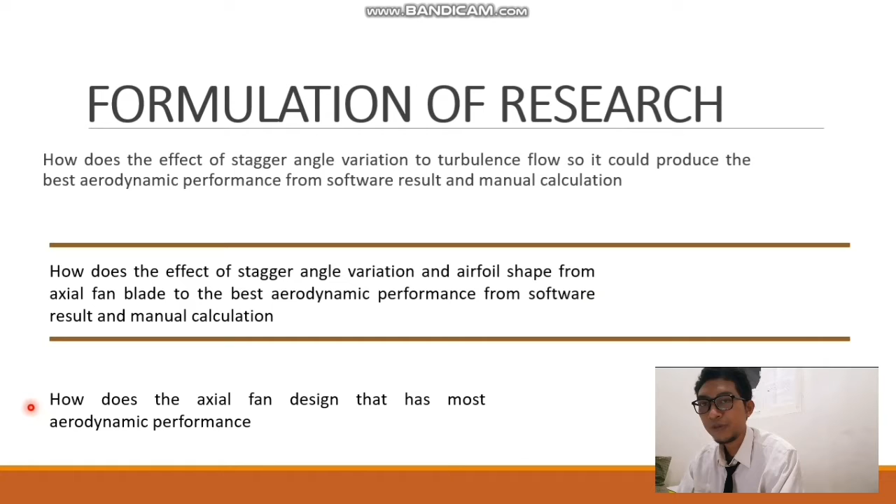Next, my limitation of problem for my research: the diameter of the axial fan, hub, and motor was not varied; I picked the diameter or dimension of the axial fan from the last research for validation data; and the last Reynolds number was obtained from ANSYS software.

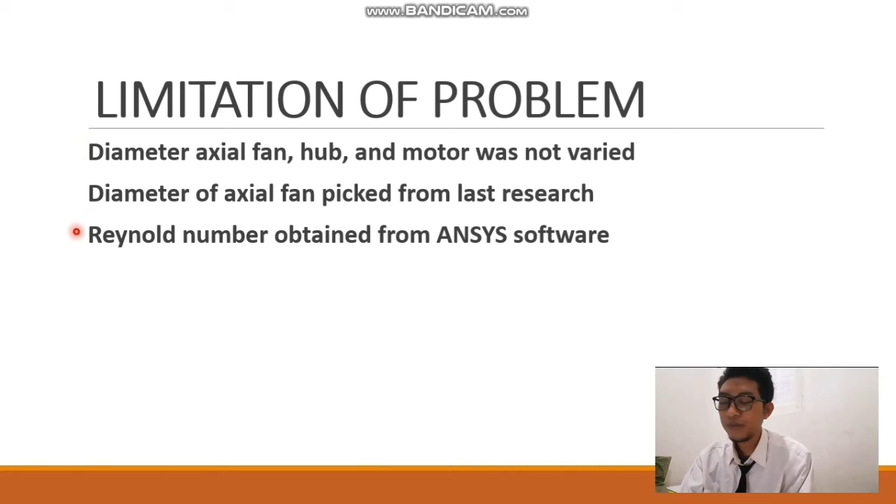Next, research object. My research object focuses on the tip span, or the airfoil type on tip span. The second is the airfoil type on hub span, and the stagger angle for tip and hub.

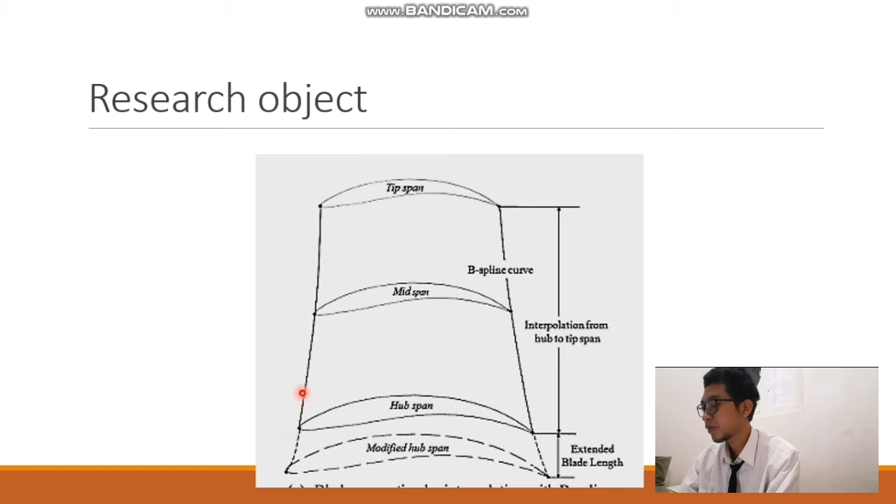Next, this is my design validation. The first picture shows the geometry of the setup used for validation data or the validation design. The second picture shows the dimension of the axial fan blade. The first number on this picture was the diameter of the fan blade from tip to tip, and the second number listed was the diameter of the hub cap.

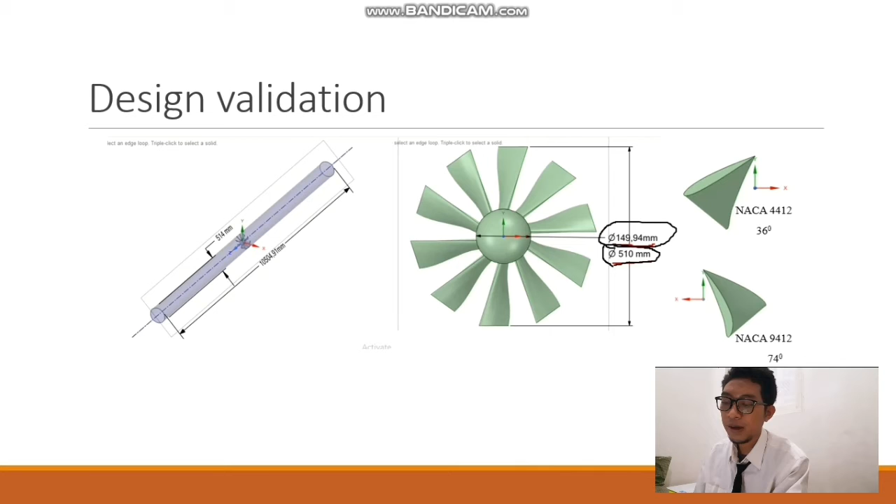This is the last picture that shows the airfoil type on the tip, and above it is the airfoil type on the hub, and this is the stagger angle variation that was picked from the reference.

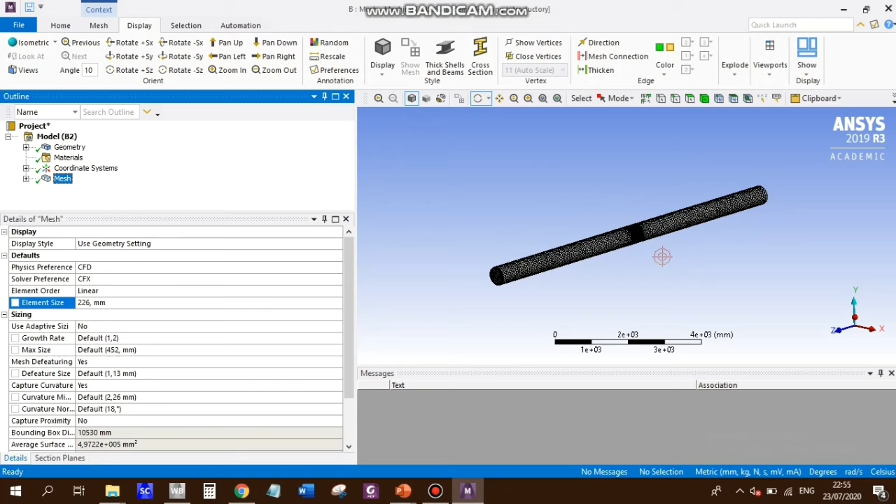This is my detail mesh. It shows the element size of 226 millimeters, and the maximum size was 2 times the element size. The length of the strut was 20 times the diameter.

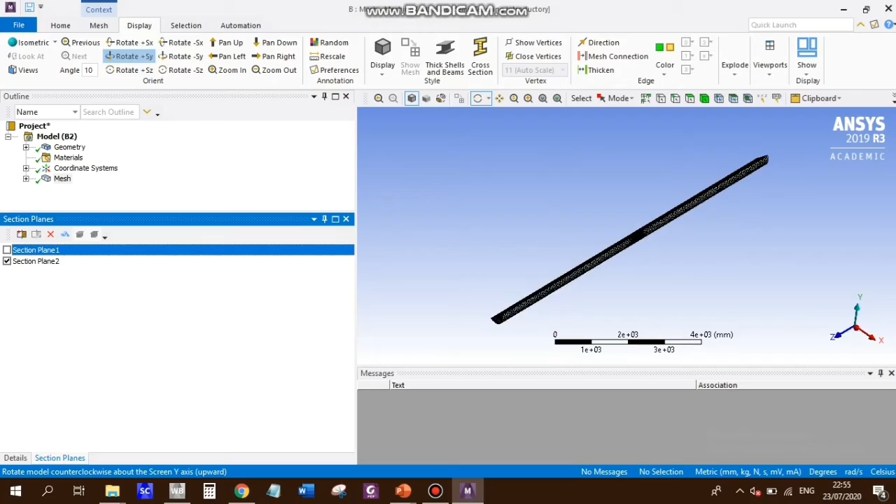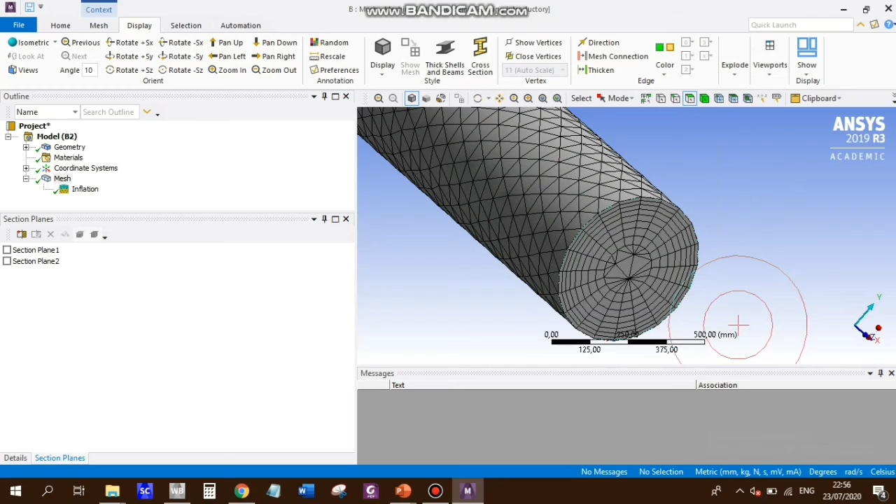This is the half part of the detail meshing, and the inflation effect for meshing.

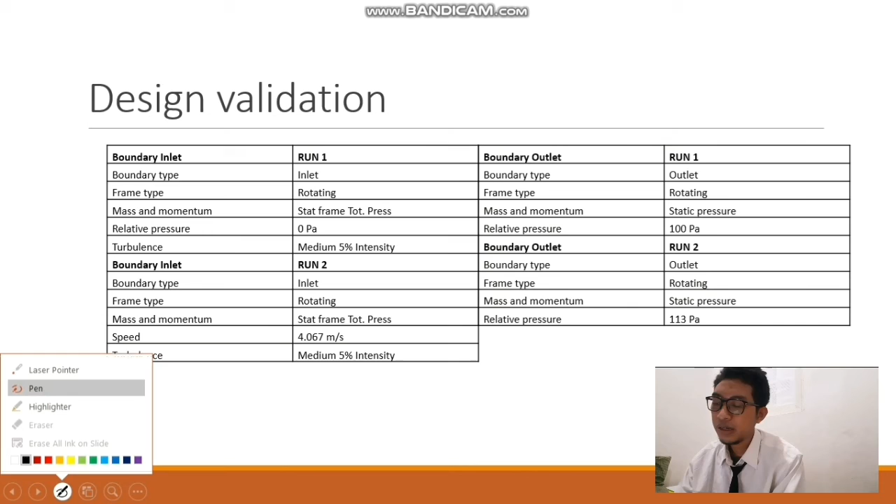This is the design validation setup. I ran the analysis 2 times: the first time for validation of convergence, and the second run was validation for mass flow and pressure.

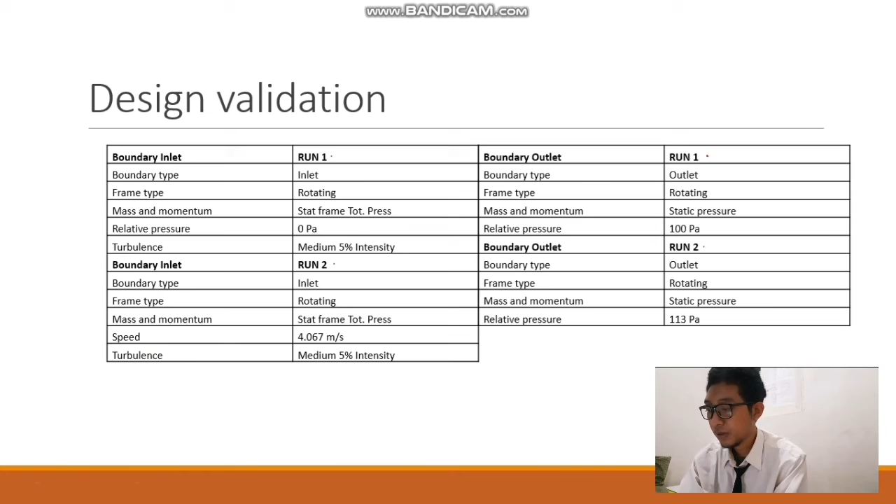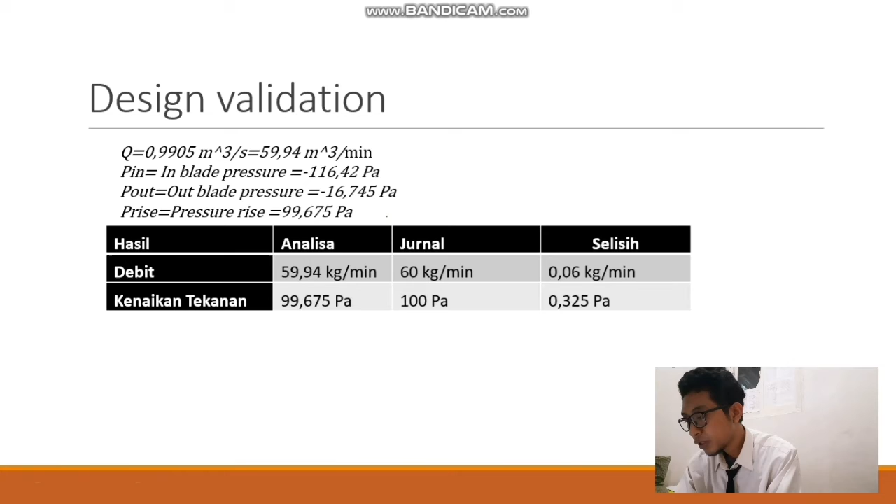And this is the result of mass flow and pressure. This column shows the mass flow from the last journal reference, and this is the pressure from the last journal reference. And this is my calculation result from the ANSYS result.

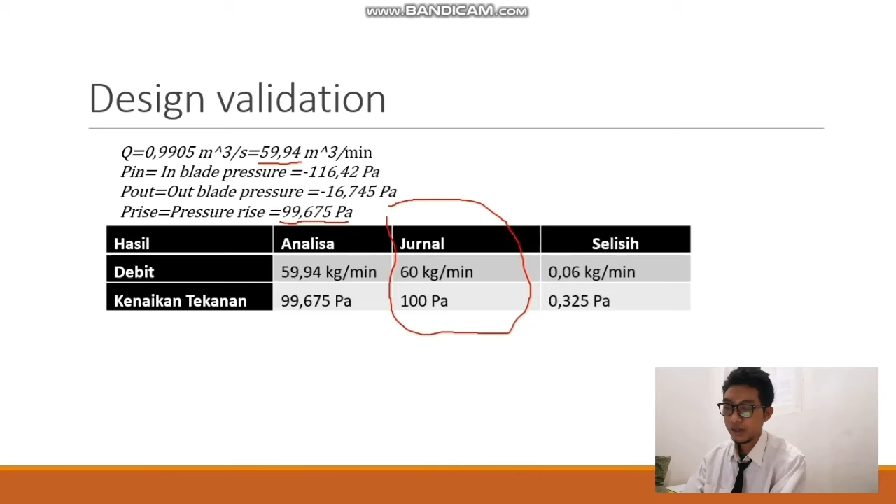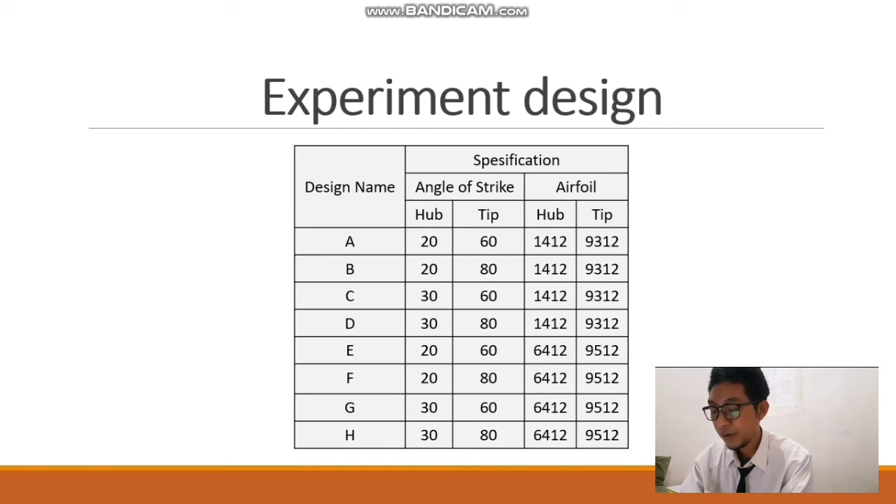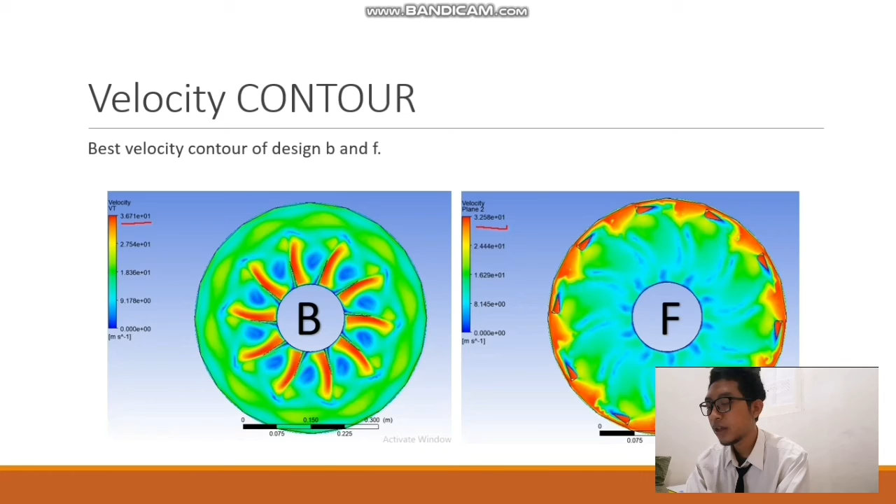The first design variation produced 36 meters per second, and the second design produced 32 meters per second velocity. That is the maximum velocity produced from this fan.

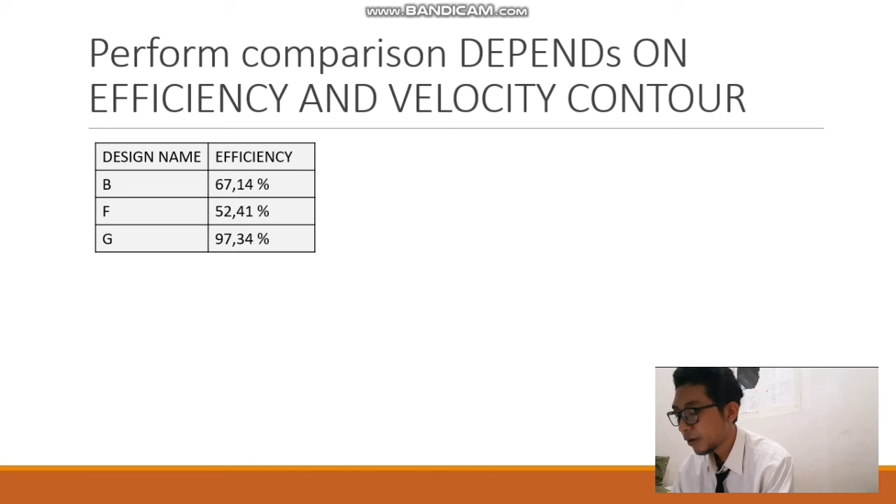And this is the efficiency of my design: the efficiency from design B and F, and design G has the biggest efficiency, so I put it last in the list, but it has higher turbulence, and I don't pick it as the best design for my analysis.

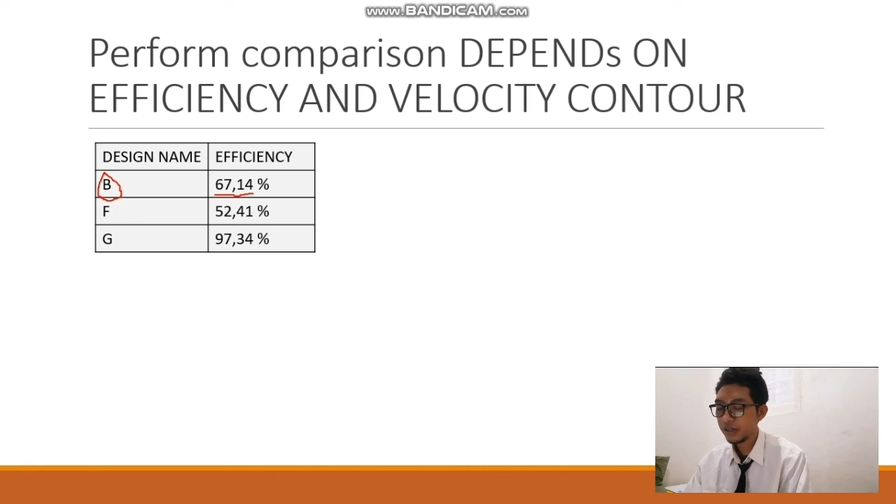So I think this is the best design for analysis. It has 67.14% efficiency. It is higher than the type F design, but it has lower efficiency than type G design. It is in the middle of them.

The last session is conclusion. First, the design that has big efficiency was the G-type design, but it has high turbulence. Second, designs that have low turbulence were B and F, but they have lower efficiency than G. But I choose the design that has low turbulence but better efficiency than the others, which was design B.